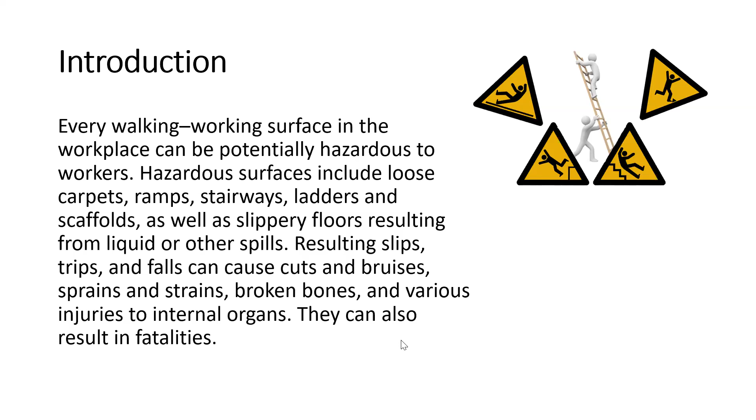Now we can see 29 CFR 1910. This 29 CFR is the code for general industry, and 22 is the section of this code. 1910 is the general industry code, and section 22 defines housekeeping.

As required by OSHA, we need to maintain the highest level of housekeeping within our companies. When we say housekeeping, it doesn't mean cleaning only. Housekeeping is a very broad term.

Have you ever heard the word 5S? Any of you? The word 5S, this terminology. I didn't understand what is 5S. 5, thumbs up. 5S? Yes. So this 5S - now write your assignment for tomorrow, you need to find out about 5S on Google.

This is basically a Japanese tool which focuses on housekeeping requirements. When we say housekeeping, it means that we need to sustain. It means that we need to standardize. We need to shine. So there are in total 5 S's.

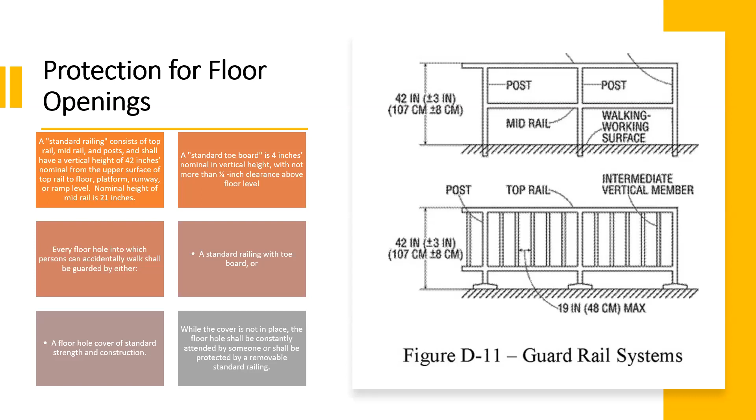Mr. Anas, you can use picture number 1 or picture number 2. Any question? Mr. Anas, I'm not able to hear you. I don't know why. Hello?

Stairways are required to have handrails under different conditions. Guys, I will mute you again, you're disturbing me.

If stairways are less than 44 inches in width, then we need to have at least one handrail. For example, if it is not a very wide stairway and not too many people are using it, then in this case we need at least one handrail, preferably on the right side, because in case of emergency people coming down need something to hold, otherwise they can collide with each other and falls become possible.

If we have stairways that are less than 44 inches, covered on one side and open on the other, we need to have a handrail on the open side. Similarly, if the stairways are open from both sides and are less than 44 inches, we need to cover both sides of the stairways.

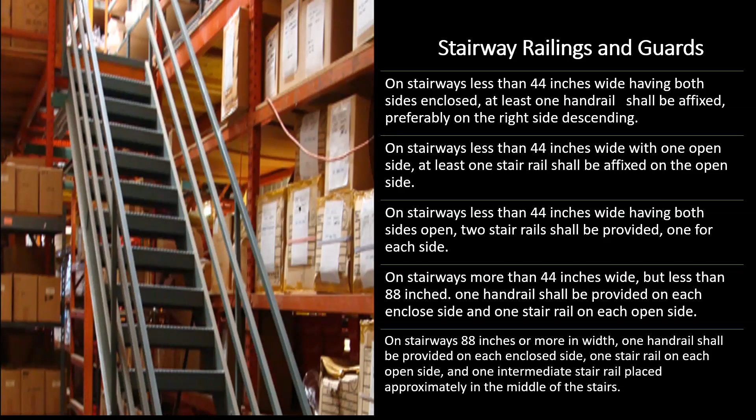Then we have fixed industrial stairs. Fixed industrial stairs are very common in the industries, right?

Sometimes you will find them fixed for some limited platform, or to gain access to some tanks, so the operator can go up whenever they want to make maintenance activities, cleaning activities, or check the temperature, pressure, or the amount of substance available in the tank. Sometimes in our stores too, we see these kinds of fixed industrial stairs available, for example when we make a platform on the same floor so material can be placed on it. So in this case, we are going to install fixed industrial stairs.

Fixed industrial stairs are discussed in 1910 section 24. It says that normally the fixed industrial stair shall carry 5 times the total weight that is going to be on it live. For example, if 2 or 3 people are using this fixed industrial stairs, or normally if there is only one person using it, they shall bear at least 5 times its load.

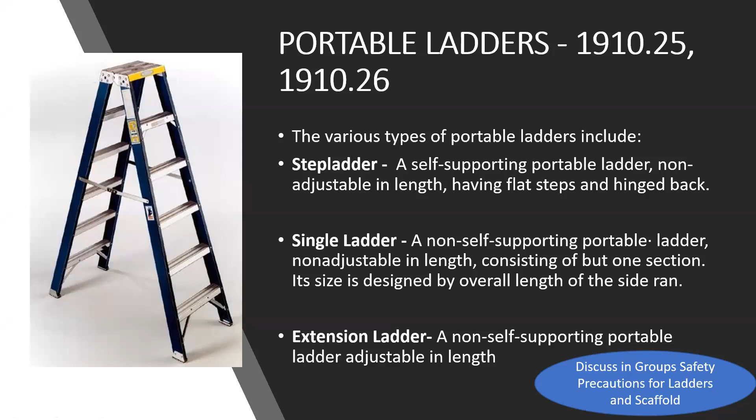So we need to know about the safety precautions regarding portable ladders, and we need to know about the safety precautions with regard to scaffolding. So what I will do now is divide you guys into two groups, so you can discuss and take out a minimum of 5 important points, and discuss in your own words the precautions with regards to portable ladders and scaffolding.

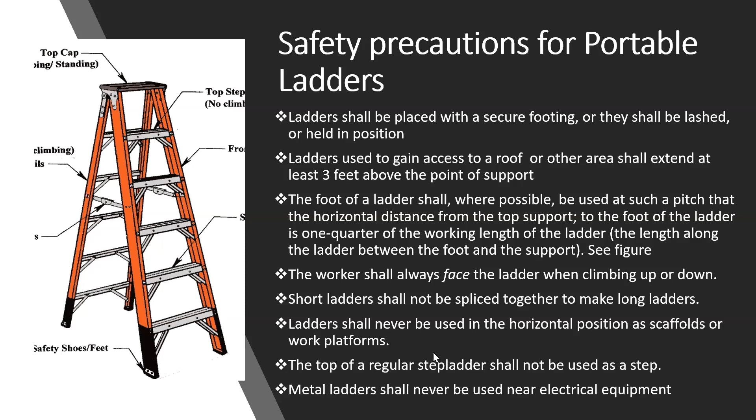Hello, yes, hi guys. You share the slide, yeah I will open the book, then someone will write it in Word. You have Adnan with you? Yes sir. Adnan is the expert for scaffolding, so your topic is scaffolding, okay? So Adnan can help all of you with this. Adnan, it is not necessary that we get all requirements from the book, but I would appreciate if you can share some practical requirements.

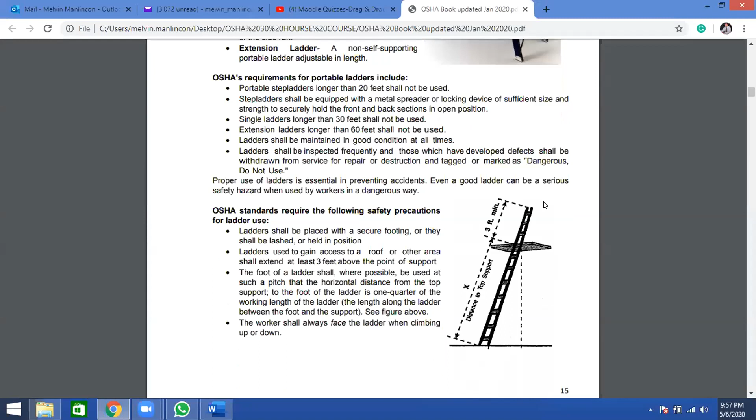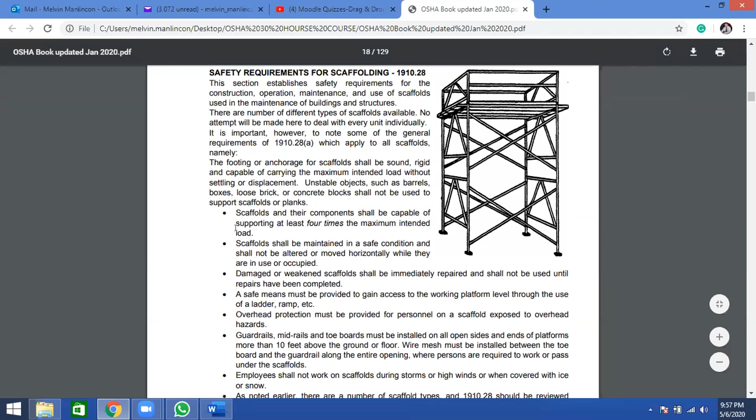Then who will do the writing? Because I'm sharing my screen, so I cannot use a Word file or Excel file right now. Hello, yes Melvin, so we are on scaffolding. Okay, so here's the scaffolding, we'll just select from this, safety requirements, then maybe Mr. Adnan could just discuss it. So which one will be our focus here? Okay, so I'll just open a Word file in this case.

Okay, so what should be our number one? Could you see my screen? Yes, I see. Please, what should be our topic number one here? Topic number 1 is scaffolding. So what do you want to read here? It's about the safety requirements.

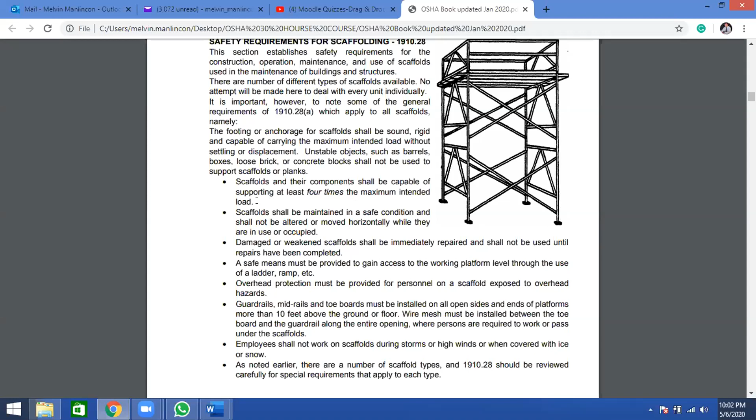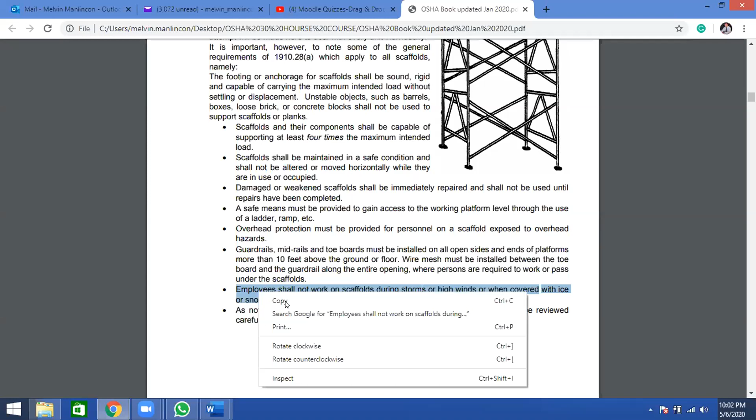Guardrails, yeah, this one above 10 feet shall not work. So of course, maybe you could just discuss this during sandstorms or high winds, right? Yes, you cannot work in that, so we'll just add this one.

The employee shall not work on scaffolding during a storm. So here in Saudi Arabia, sandstorm, right? Yes, so we have sandstorms and high winds. When covered with ice, okay, yes, so we'll just remove this one, since anyway we have no snow in Saudi Arabia, so let's just remove this one.

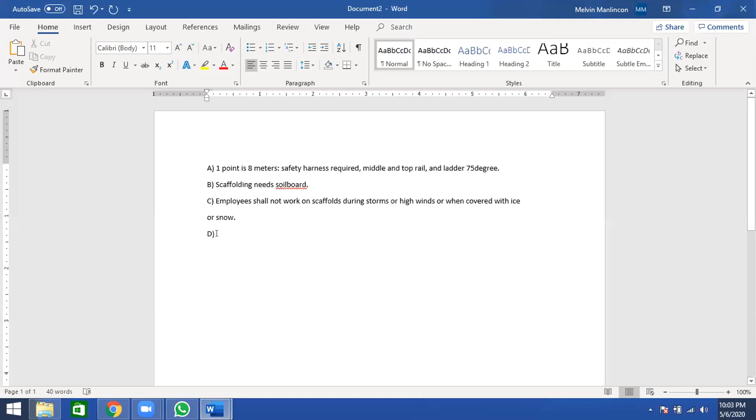Yes, okay, what else? I think we need at least 5 for scaffolding with sole board. So what else? Guardrails already mentioned, overhead protection, right? Yes, okay, yes, so then last one.

The last one mentions this hole, floor hole, or the platform hole. Hole, less than 12 inch. Floor hole, a platform hole. What's the spelling? Platform.

F-A-L, F, P-L-A-T, F-O-R-M. Pardon? F. P-L-A-T, platform, P-L-A-T, F-A-L. Could you... where's the chat? Could you just send me a message, guys? No, P-A, okay, P, so P-A, P-L, L, P-L, P-L-A-T, F-O-R-M. Slowly, is it correct? P-A-L-A? No, P-L, P-L, L-A, A-T. Yes, platform, not platform, platform. Platform, sorry, okay.

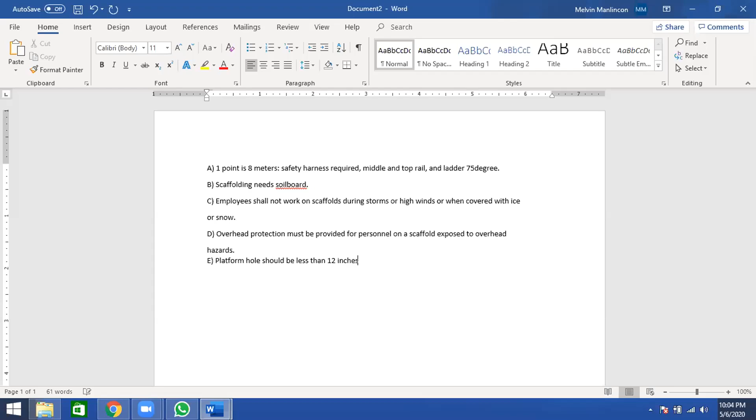The platform hole should be less than 12 inch, should be less than, fast, I'm going to finish in 1 minute, less than, should be less than 12 inches. Yes, 12 inch. So yes, guys, done.

3 foot minimum, yeah, 3 feet of ladder extending above the wall, the ceiling or the edge. Yeah, 3 foot minimum. Yes, guys, done, or still working? Yes.

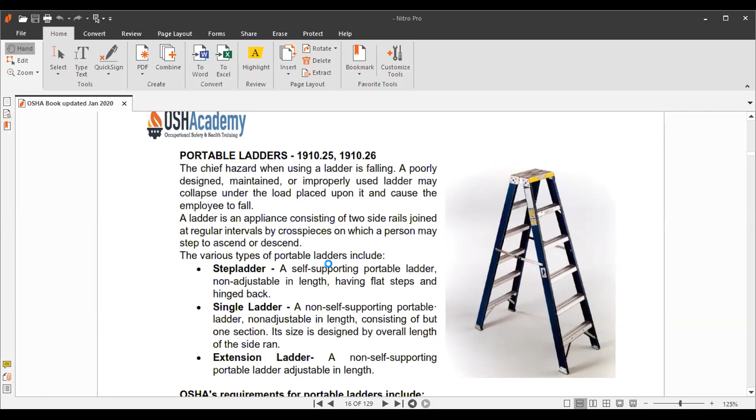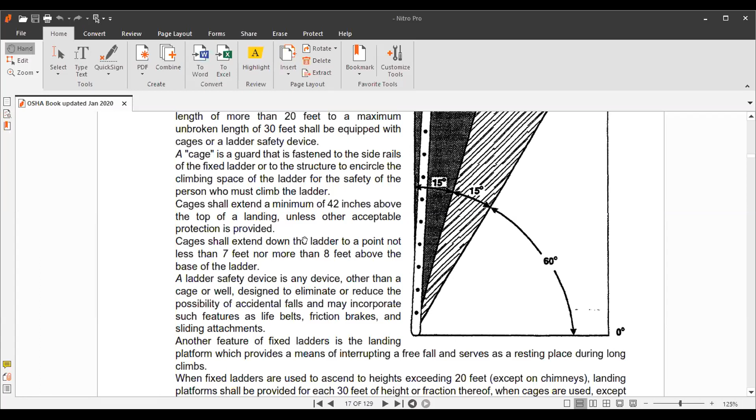We have covered some points here. Okay, last 2 minutes, fast. Steps, the distance, you see this angle, this angle 60, plus there is 15, 75, and 75.

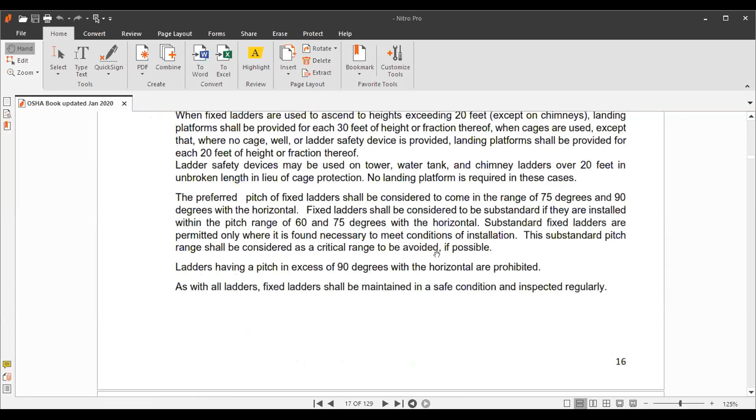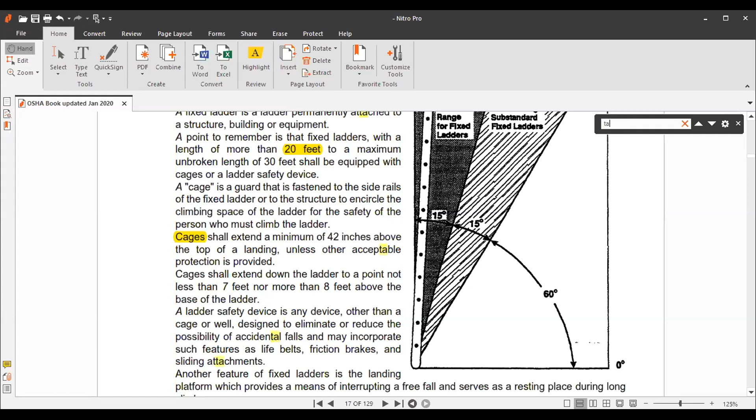Ladder shall be placed with secure footing all the time while we are going to use the ladders. Ideally, ladders should be inspected on a monthly basis if they are not frequently used, and not only monthly, but whenever you are going to use it, you need to carry out a pre-use inspection. During the monthly inspection of the ladder, if we found there is no damage and the ladder is in good condition, we can put a green tag on it, fit for use. Or if we point out that this ladder is not good for use, we can make it hold, and if maintenance is required we can make it hold, otherwise we can red tag it to not use this ladder. So that's why ladders are very critical operations, and there are always too many chances of accidents. Very good.

So about scaffolding, second group.

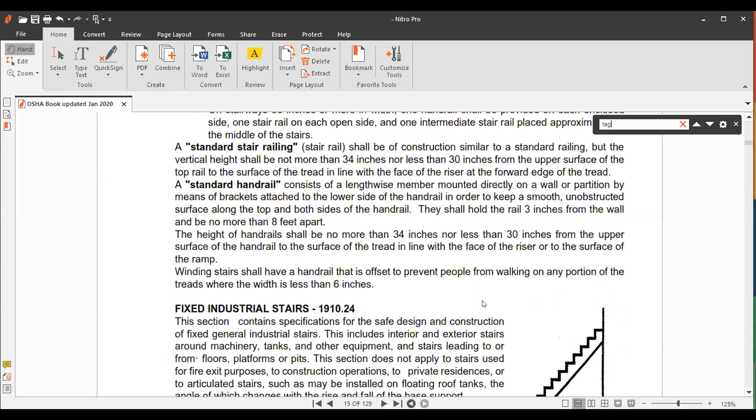Scaffolding. For the safety requirements for the scaffolding, Mr. Adnan Khan will discuss our points. I think Melvin, it's better that you share your screen and you can read whenever needed. Adnan can participate with you.

Yeah, okay, so once again, good evening to everyone. So for scaffolding safety requirements, at this session or workshop, Mr. Adnan was our advisor since he is working in scaffolding. So one point is the 8 meters, you write here 8 meter, 1.8 meter.

So he has written 1.8. Mr. Adnan will help me discuss it with you.

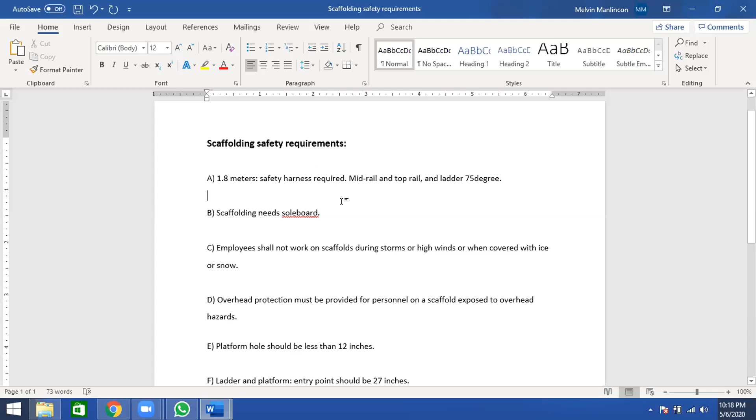In working with scaffolding, safety harness is required, as well as mid rail and top rail, and the ladder should be at 75 degrees. Whenever Adnan needs to add something, he will speak. Only 1.8, it should be decimal, 1.8 meters. So safety harness is required with mid rail and top rail, and the ladder should be at 75 degrees.

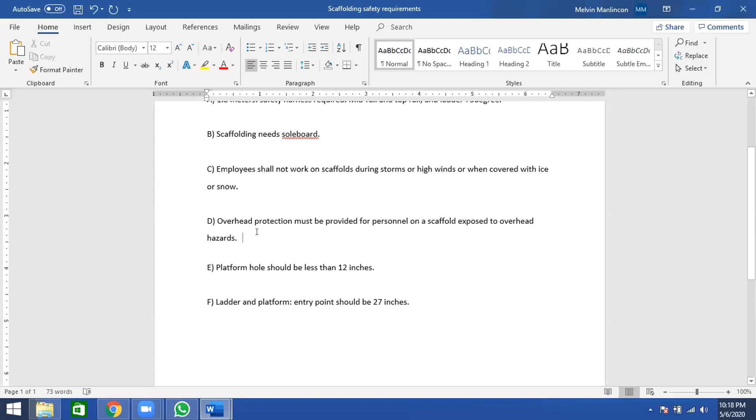Second point, scaffolding needs a sole board to stand firm. Scaffolding work is considered working at height, so employees should not work on scaffolding during storms or strong winds. We should also use overhead protection. Another point: platform holes should be less than 12 inches, and ladder and platform entry points should be 27 inches.

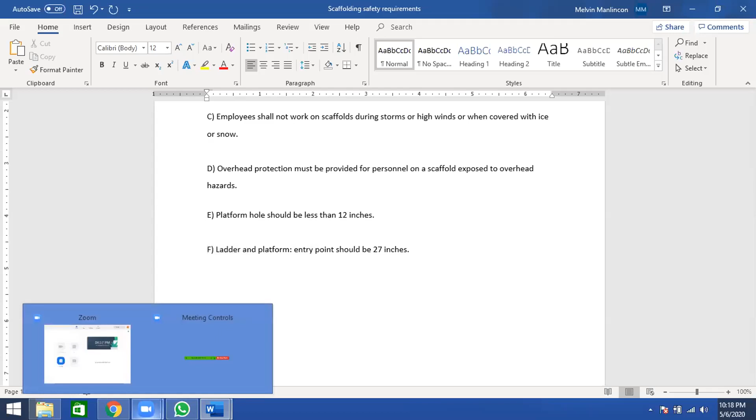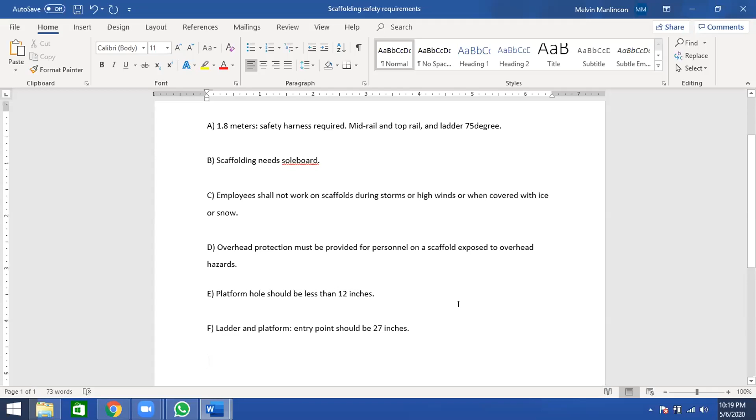Very good. Anything else, Adnan, or anyone else? I'll add one more topic: the ladder fixed to the platform should be almost 1 meter above it, 1 meter needed. Is it okay to use a ladder on the scaffolding?

Can we use a ladder on a scaffolding? OSHA does not prohibit it outright, but OSHA says it is a violation to use a ladder on a scaffolding, because if you are already using the scaffold, better to use the scaffold itself rather than a ladder. But scaffolding is needed sometimes, and this is a standard aluminum ladder that is used.

The platform is fixed with a clamp, either single clamp or double clamp fixed, after you use the ladder.

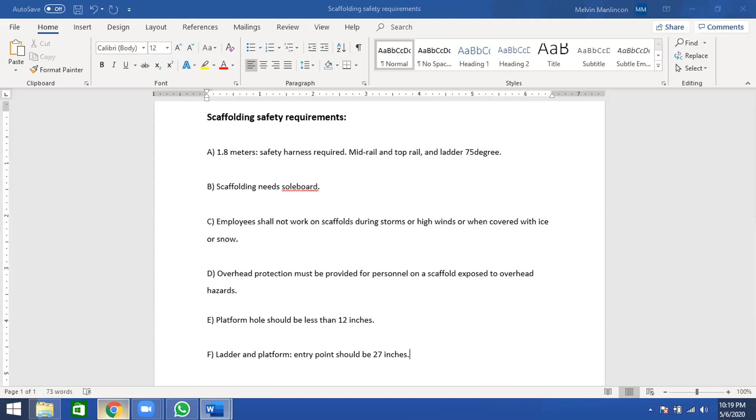One more thing, guys, about the scaffold: what is a sole board, and what is the entry point? The sole board is so that the pipe does not sit directly on earth, for stability. It's the same as the sole of your ladder, like a foundation, like the feet. Yes, this is the sole board, small support.

Another thing is when the scaffold can carry up to a certain load. Guys, you can stop sharing the slide, I will share mine. When we have the scaffold, it is necessary that the scaffold is designed to bear 25 pounds per square foot.

We call it a light duty scaffold when it can bear 25 pounds per square foot. Pound is a unit of force, and if 25 pounds can be borne by 1 square foot, we call this scaffold a light duty scaffold. Similarly, if 50 pounds per square foot can be borne, we call it a medium duty scaffold. And if it is 75 or above pounds per square foot, we call it a heavy duty scaffold. This is a general classification, and whether it's heavy, light, or medium duty depends on the design of the scaffold.

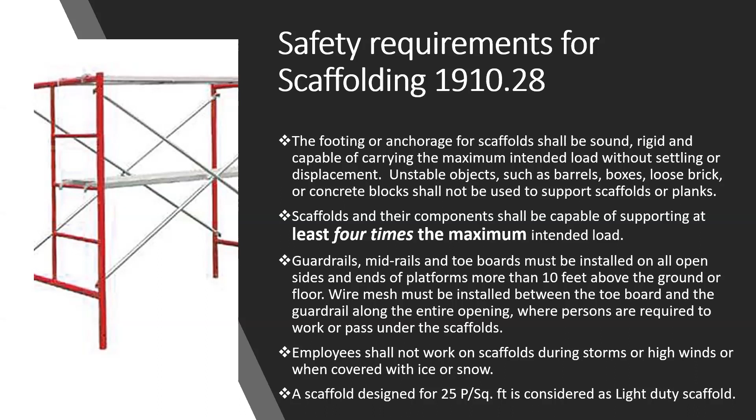In the OSHA 30 hour construction course, there is a full chapter on scaffold, and we are going to discuss it in detail.

Let's have a revision. Select the priority: what is the priority order for risk hazard abatement methods? Option A: administrative control, PPE, engineering control. Option B: engineering control, PPE, administrative control. Option C: PPE, engineering control, administrative control. Option D: none of the above. Which one is correct?

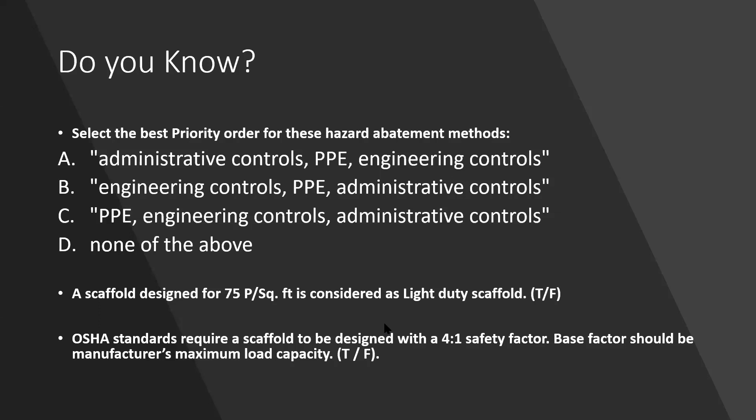Yes guys, it's none of the above, because PPE is never last. So it's none of the above. The right order is PPE last, engineering control first.

Okay good. Our next topic covers basically three topics in one module: exit routes, fire, and FPP. FPP stands for Fire Prevention Plan. This is one of the lengthiest modules; after this, all the modules are very short and we can speed up our learning process. So we will start with exit routes, then move to fire, then FPP.

What is exit route? Exit route is a continuous unobstructed path of exit travel from any point within a workplace to a place of safety. In simple words, this is the route which is leading to our emergency exit.

This route, or what we normally call emergency exit in our discussions, OSHA does not use the word emergency exit. OSHA uses the word exit. So whenever you find the word exit in this module, it means we are talking about emergency exit. If you have more than 2 exits in one room, you can declare one of them as an emergency exit, no problem. So an exit route is a continuous path which is unobstructed.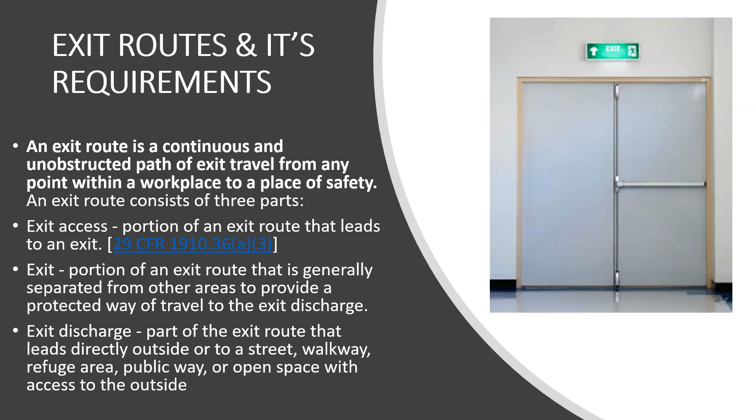Exit discharge is the area outside which is safe.

Now the requirements for exit route: there must be at least 2 exit routes available to permit prompt evacuation during an emergency. When we say exit route, it doesn't mean 2 emergency exits, it means 2 exits total. One of them we can declare as emergency exit, and one as normal exit. So if fire or emergency is on one side, we can go from the other side. Or if the fire is not in our area, it is in another area, so we can use any of the exit routes to get out of the emergency.

So the emergency exit should be located far away. It might be possible that to meet a standard's requirement, you end up having 2 doors at one place on the same side of the wall, adjacent to each other, while the opposite wall and other walls have no exit. This is not acceptable practice. Exits must be far away from each other, because if there is a fire or emergency on one side of the door, people can use the other door to evacuate the building.

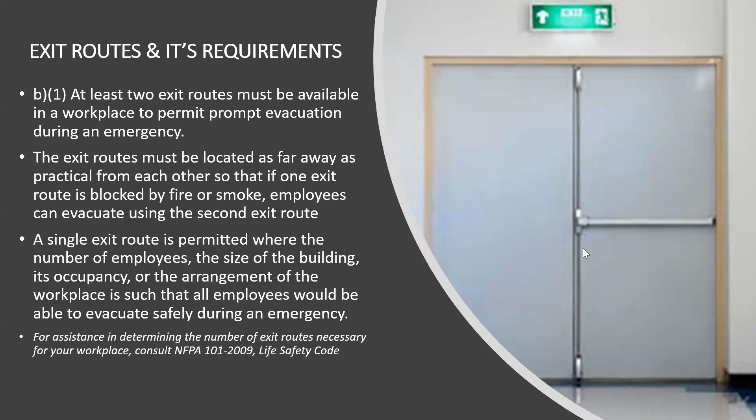And this more than one exit could be, one of them could be the emergency exit. Any question? Clear? Clear, sir, clear. Okay, good.

So the requirement for exit access is that buildings must be maintained to provide free and unobstructed egress from all parts of the building at all times when it is occupied. These emergency exits, emergency access, or emergency discharge always have almost the same requirements. One major requirement for all three is that these should not be blocked, should not be locked, and should not be obstructed by any means.

We have seen many times in our stores and production areas that forklift drivers and our people love to put pallets in front of the emergency exit, because they think this emergency exit is not going to be used. So they put old garbage, stock not in use, or stock that just arrived. Sometimes during audits we notice pallets or boxes blocking the emergency exit or exit door. When we ask why these boxes or pallets are there, they come up with the lame argument that the material just arrived and they will inspect it and place it properly later. This reason is unacceptable.

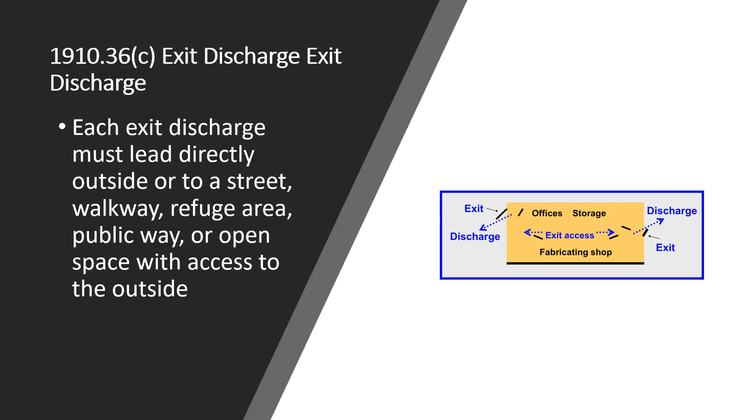We have the same regulation for exit access, exit door, and exit discharge. So as safety professionals, we should not be satisfied just seeing the exit access and exit door are clear. We need to check the door by opening it to see if the requirements are fulfilled or not. Every required exit, the way to approach it, and the way to travel from the exit into a street or open space, shall be continuously maintained.

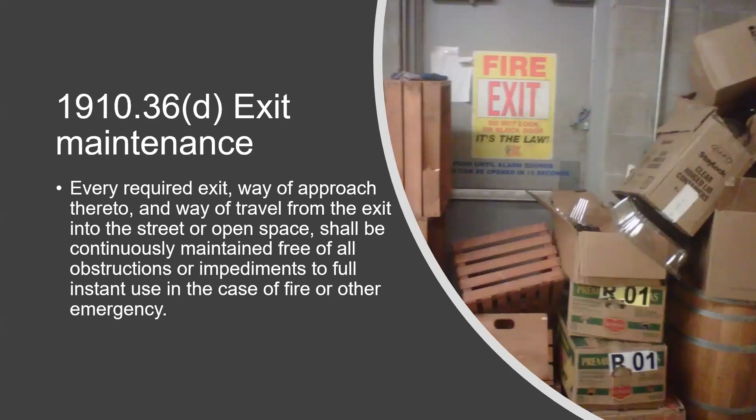Again, you will see the same requirement for the maintenance of the exit door, that it should be continuously unobstructed. And if there is a need to go to the open area, the exit access should be clear and free from any obstruction.

Another requirement is that a side hinge door must be used to connect any room to an exit route. For example, if the exit is far away and there are multiple rooms or halls you have to cross to reach the final exit, these doors, if closed, shall not be locked and can open anytime. They should not be sliding doors; they should open in the direction of going out.

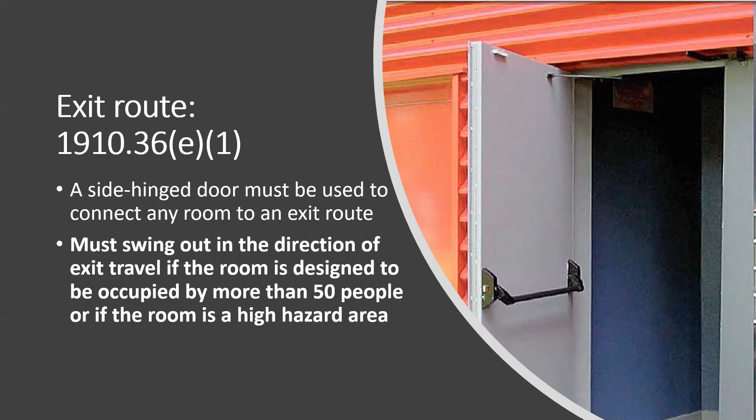Whenever we have more than 50 people available in an area, the emergency exit should always open outside. It is also a requirement of our civil defense and Civil Defense that we need to install push bar doors. These push bar doors, which you will find everywhere in companies now, can be opened from inside but cannot be opened from outside. So push bar doors are a requirement nowadays.

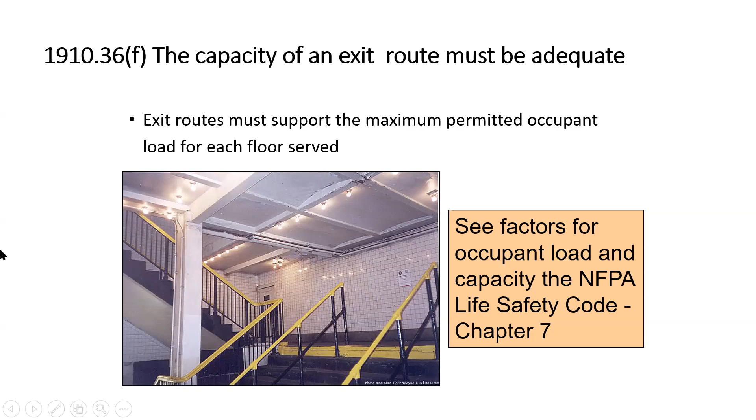Exit routes must support the maximum permitted occupant load. You can see in hotels especially, a lot of occupants stay on the above floors. If they are all coming together, our exit stairs and exit route shall bear their weight. It should be strong enough and spacious enough to bear the weight of occupants coming from above floors or other areas to go out. So the capacity of the exit route may not be decreased in the direction of exit.

Sometimes your stairs are very wide, but the emergency exit at the end doesn't meet the required standard size. It becomes a bottleneck, people come from the top and gather too much, wanting to go out, but the door is too small compared to the stairs. In this case, people get stuck and there is a chance of collision and injuries.

The ceiling should be at least 7 feet 6 inches high. For example, when coming from the first or second floor to reach the emergency exit, that area should always be 7.5 feet open, so a person can go easily and reach the emergency exit. The emergency exit itself should have a minimum height of 6 feet 8 inches, around 7 feet, so a person can go easily.

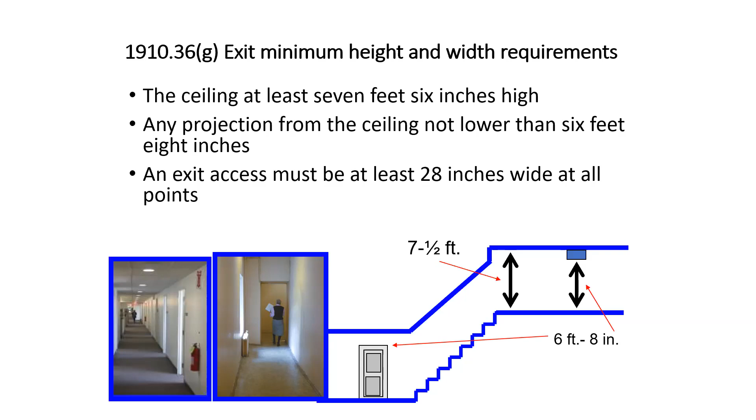There was also an emergency problem with HVAC systems that are interconnected between rooms. This is a common accident in hotels: people are sleeping, there is a fire in one room, and due to the HVAC system the smoke goes into other rooms, affecting other sleeping people. This is the same concept of compartmentalization.

Nowadays, even in HVAC systems, we don't connect all rooms with one pipe. We need to make compartments and partitions, so if one room is affected, all the other rooms shall not be affected—only a limited number of rooms can be affected.

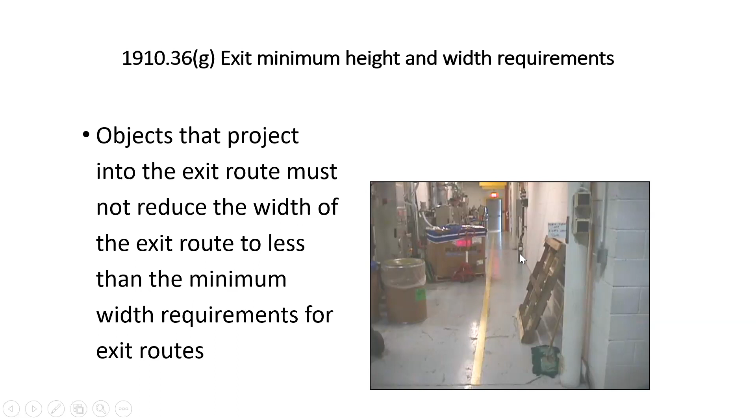Another common example is pallets placed in the walkway or exit access. Sometimes even fire extinguishers, mops, or boxes are placed there. These kinds of practices are common.

Another precaution regarding emergency exits is that we should not keep any flammable material near the emergency exit itself, because in case of fire, if that material catches flame, it will also involve the emergency exit area. Then the fire will be near the emergency exit, and how will people go out in this situation?

Lighting and marking must be adequate. Sometimes during occasions like National Day, Eid, or Christmas, when we decorate our offices and buildings, we don't focus and end up hiding signages, smoke detectors, or emergency break glass call points. These kinds of activities should not be performed.

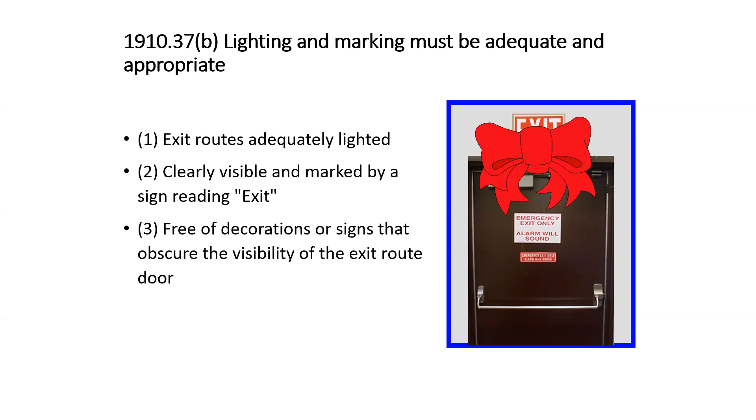Whenever we have the emergency exit, the exit sign shall be clearly visible and free of any decoration pieces, so that in case of emergency, people can see it easily.

Whenever we are working in an operation or production area, it might be possible that due to the size of machines and equipment installed, we will not be able to see the emergency exit directly. In this case, we need to provide clear signage so that people at any location can clearly see where the signs are and which path they need to take to go out of the area safely.

Sometimes you can achieve this by means of a walkway or signage marked directly on the floor. Nowadays there are very good quality paints available for marking purposes, or self-illuminating lights that you should install to show the direction of the exit route.

Always remember, when we talk about emergency exits or emergency access, there is no concept of relying on electricity as the first source. In case of emergency, the first thing maintenance people do is turn off the power of the company or area, because if the power stays energized, there are more chances of disaster. So all our emergency signs and exit identifications shall be self-illuminated.

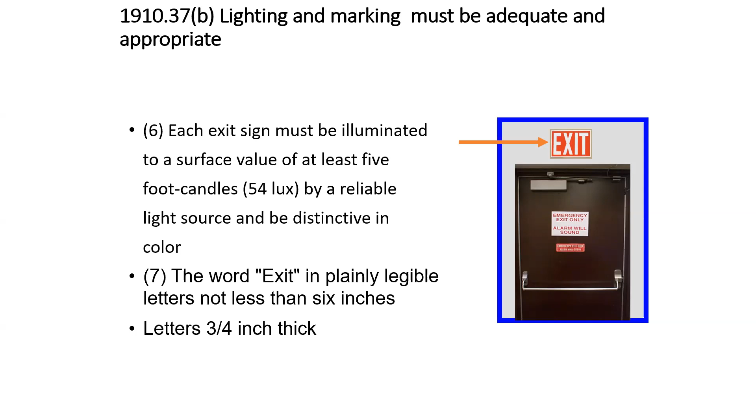The wording should be very plain, with a letter height of 3/4 inch thickness. So it should be quite clear—no fancy designing or calligraphy just because we consider ourselves artistic people. Signs should not be made that way.

Whenever there is a need for maintenance activities, ideally we are not required to block the emergency exit. But if it becomes very necessary to block the emergency exit due to maintenance activities, it is the responsibility of the people, the contractor, or the maintenance department to inform the people in this area that the emergency exit is blocked for some time—for example, 4 hours, 2 hours, or 2 days.

Because when we are sitting in our offices or working in our companies, at the back of our minds we are confident that our smoke detectors, fire alarms, and emergency exits are working fine. So if any emergency equipment or gadget becomes out of order and we have no idea about it, and an emergency situation arises, it will be very difficult for us.

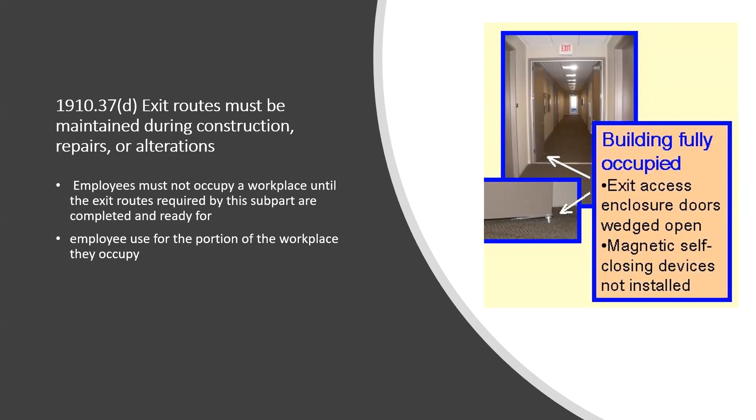That's why, whenever it is routine or non-routine maintenance where you are going to disconnect emergency equipment, or block the emergency exit or exit access, you need to inform the people who are working or occupying that area.

An exit must be separated by fire resistant material. Even here in the Kingdom, it is a requirement from the Civil Defense that whenever you are going to install the doors, they must be fire resistant. So when you are going to purchase the doors from any vendor who is providing fire resistant doors, he will ask you the question of how much time of fire resistance you need.

You need half an hour, 1 hour, 2 hour, 3 hour, 5 hour, or 10 hour resistance. Based on this, they are going to give you the quotation, because the more height or taller floors we are going to use, the more fire resistant capability the emergency exit should have.

For example, if our building is ground floor, first floor, second floor, up to 3 or fewer stories, then 1 hour fire resistant is enough. But if we have 4 or more floors in our building, our final exit must be minimum 2 hours of fire resistant, which means that even if it remains in fire for 2 hours, there should be no problem. This is one of the requirements.

Yes guys, any question from exit? Are you there or sleeping? No, sir. Clear? Everything's clear? Yes, it's quite clear.

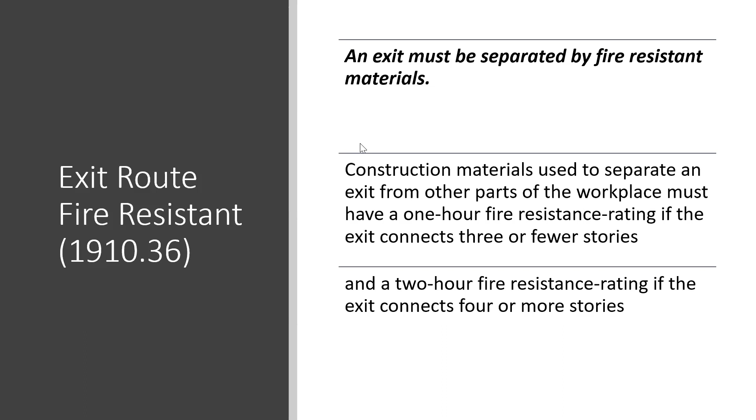Okay guys, what is emergency action plan? EAP, emergency action plan, is very necessary to develop in all organizations, right?

Whether you are following OSHA or not, nowadays COVID-19 is one of the emergency situations. We have fire in oil and gas, we have H2S emergency situations, gas leakage in some companies. For example, when I was working in the steel industry, we had ammonia gas where we crack ammonia into nitrogen and hydrogen.

For example, if you are working in a steel industry, you have emergency situations like falling of load, falling of coil, or falling of material from the crane. These are common emergencies in many industrial areas. It is not necessary that all companies will have the same emergency situation.

So the standard says we need to have the emergency plan according to our requirement. It is very necessary that if you are in oil and gas, you should not follow the requirements of general industry, the manufacturing company. Since we need to follow our own emergency requirements, we follow our general industry rule.

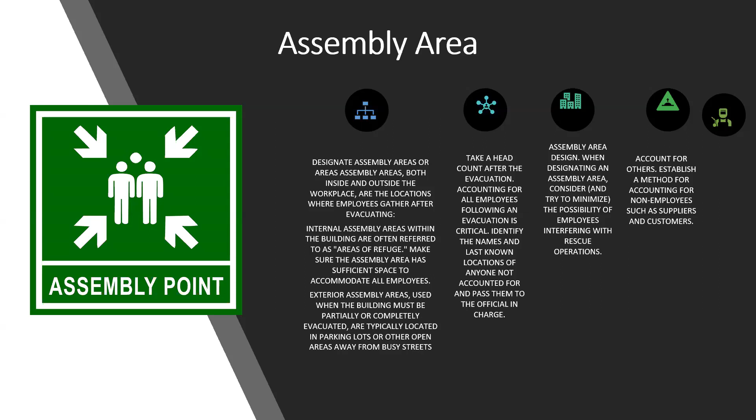That's why, as part of our emergency preparedness, we need a centralized announcement system - not just an alarm system, but an announcement system - to tell us where we need to go, where we need to evacuate, and which departments are required to evacuate. It might be possible that the emergency is only in one or two departments and not the whole company, so a centralized addressing system can be used to give directions and instructions on how we are going to react in this situation.

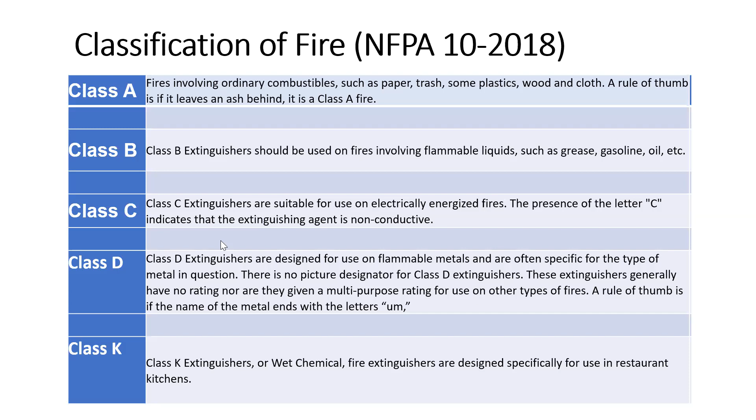Your assignment is types of fire extinguishers. Okay, types of fire extinguishers. Just focus on three types: powder, CO2, and water. Right? Quick.

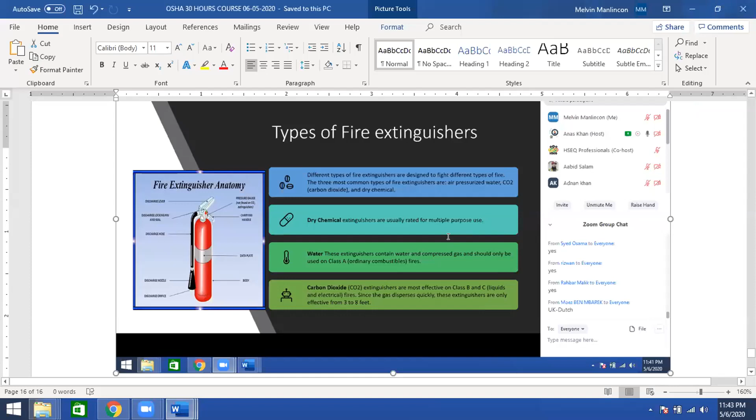So who else are there? There is Melvin, Rahbar, there... guys, you will be discussing the classification. Okay, classification, types, classification of fire extinguisher. Yes, this one. Not this one. Yes, this one. Classification.

Yeah, Melvin, you can start.

Yes, so class A fire extinguishers are for - the rule to remember is anything which becomes ash once you get rid of it, so it's what becomes ash after the fire is controlled. Examples like paper, trash, plastics - all these kinds of things become ash. Wood and cloth. So who is writing? Melvin, will you be the one to speak today?

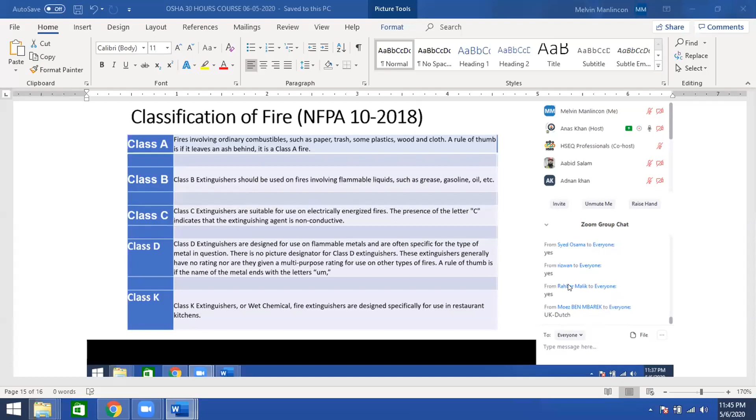Class B will be anything which involves flammable liquids and catches fire. It can be benzene, what we say in Saudi Arabia, any kind of gasoline. Anything which has a liquid form and can be flammable liquid uses class B.

So Rahbar and I will start. Yes, please. Rahbar, can you start with classification of fire? Hello. You can start, Rahbar.

So there are basically five major kinds of classification of fire extinguishers, according to safety. Class A is ordinary combustibles, the thumb rule being whatever transforms to ash after the fire is controlled. Example, if paper or plastic catches fire, it keeps a bad kind of ash, but still ash. Then you have garbage or trash, etc. Whatever forms this kind of object if they catch fire - it's class A, an ordinary fire extinguisher you can say.

Then class B is flammable liquids, any kind of liquid which can catch fire, like grease, benzene - we say in Saudi Arabia, petrol in India, Pakistan. So if that kind of liquid catches fire, to control it well we use class B fire extinguishers.

Class C is for electrical equipment, non-conductive. So some rule in that - any kind of electrical, to save it from further electrical hazard or electrical fire, to be precise, you use class C fire extinguisher.

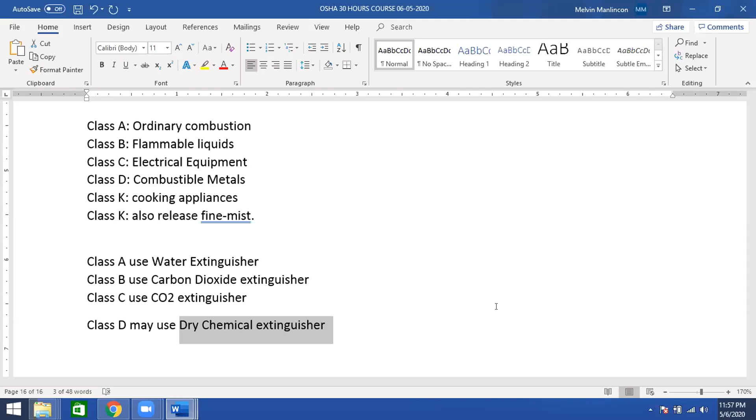Okay, thank you, very good, very good, very good. Yes, next group.

Hello. So now we're going to discuss about fire extinguishers. We're going to discuss about 3 fire extinguishers: dry chemical, and water.

Starting with water. These kind of extinguishers contain water and compressed gas and should only be used as class A. Class A is a very ordinary kind of combustibles, so when we talk about water, we're dealing with papers, trash, and all that stuff. It's not going to be a very severe fire, by putting water into it.

Now comes CO2. CO2 is most effective on class B and C. These classes are something which could turn into a catastrophic situation. Carbon dioxide extinguishers are most effective on class B and C, like liquids and electrical fires. Since the gas disperses quickly, we need to keep in mind that in order to be effective, it should maintain the distance between 3 to 8 feet.

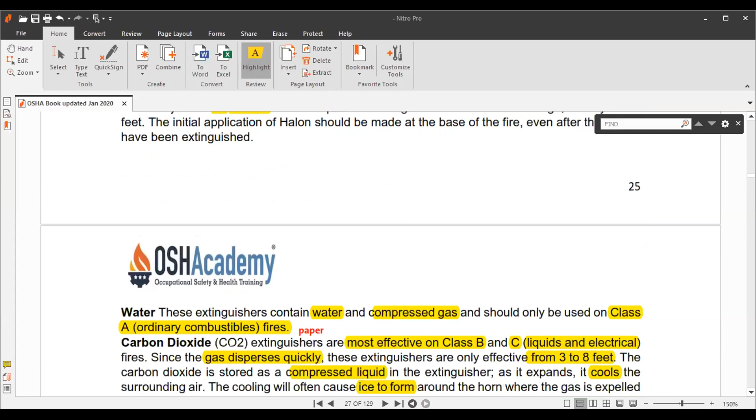Dry chemical, we can use it for multi-purpose. And just for CO2, we cannot use this in confined spaces because it can cause asphyxiation of the user. At confined spaces, we need more amount of oxygen.

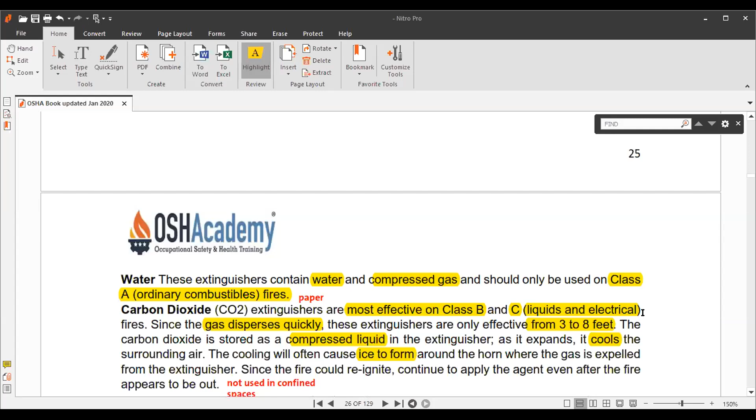Now my one question I have: if you guys have seen that most of the time we have a gauge available on fire extinguishers, but on CO2 we don't have the gauge available. Why?

Because the gas pressure release from the extinguisher could be done in one go. There is no quantity setup, or the flow setup is not required. Whenever we have the gas, the gas is occupying all the area, whatever is available. If you have a small area or a large area, the gas is going to occupy all the area. So even a small quantity of the gas in our fire extinguisher, still this gauge would be keeping it full, right? It will show that the gas is full.

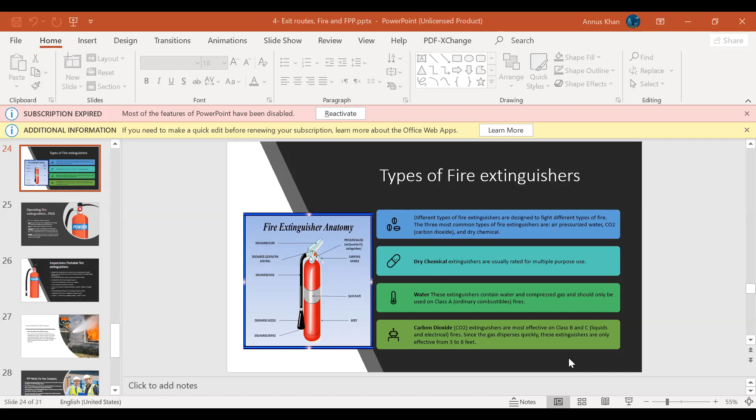If we have the gas full, it will still be showing full. So it will become useless. That's why for CO2 or gas related extinguishers, we are always checking by weight, right? The weight is mentioned on the cylinder itself, and we go by weight, not pressure. You need to check by weight, 5 pounds, 10 pounds, or 5 kilos.

In liters, kilos also we can measure, right? Yes, exactly, 50 liters, 100 liters, like this.

Also, one of the reasons we have the gauge on DCP or water but not CO2, is because in DCP or water, the gauge is with the medium itself. There are two mediums in the DCP: one is the pressurized nitrogen gas, and another is our powder. So with the passage of time, if we are not going to shake this fire extinguisher minimum on a monthly basis, the powder, which is heavy, will go down and settle, and all the gas, which is a lighter medium, will go up. That's why whenever we are going to use the fire extinguisher for DCP, it is highly recommended to shake it, especially to keep it ready all the time, we need to shake it when we perform the inspections, right?

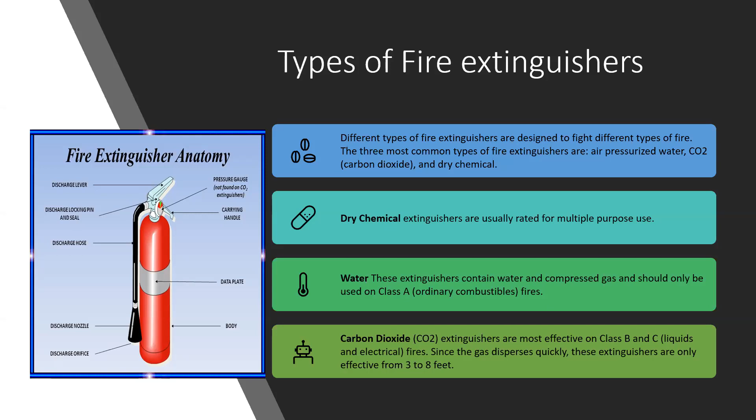Okay, now how to use a fire extinguisher. I hope everyone knows about this—we need to use the word PASS: pull, aim, squeeze, and sweep. Pull the pin out, then aim at the bottom of the fire, at the root of the fire from where it is igniting, and then squeeze. We need to squeeze the handle, so press the handle and the medium inside will come out, and the direction of the nozzle should be on the fire. And then we need to make a sweep.

Don't use all the fire extinguisher at one place, because fire is spreading. You should also use the fire extinguisher medium on the nearby area, so there is no chance of fire. It is recommended that whenever you use a fire extinguisher in any area, you should remain vigilant for a minimum of 15 to 20 minutes, because it might be possible that the fire inside or under the surfaces still has some source of energy remaining. When you leave the area, with the passage of time, it gets more oxygen, and heat is already there, and fuel is already there.

So there is a chance that it will reignite. In companies, whenever you are doing this activity, it is the responsibility of the fire watch. This person remains there even after you fight the fire, or whenever you use any ignition source, to make sure there is no such fire situation available that could reignite, right?

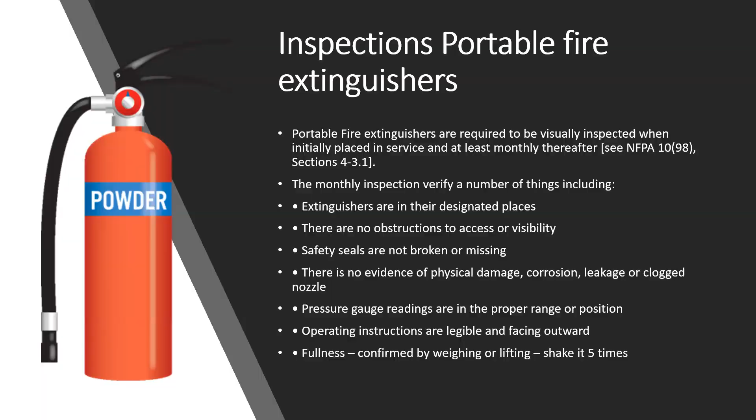So these are some of the requirements for the fire extinguisher. Then we have FPP, fire prevention plan. Remember, before we discuss the emergency action plan, the emergency will come later on. The first thing we need to cover is preventing the fire.

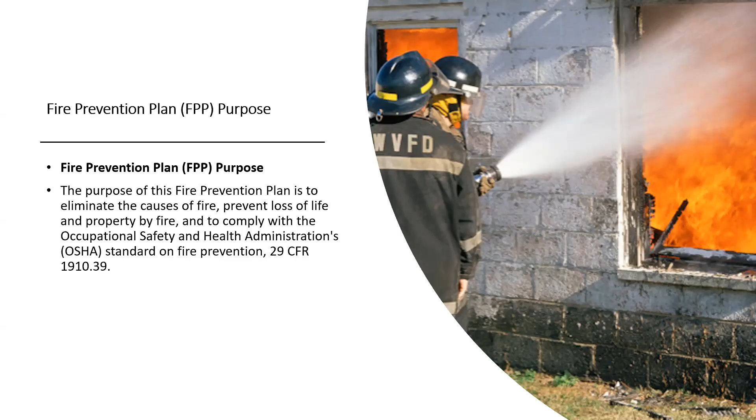It's very simple. The fire prevention plan says that we need to identify all possible areas where the chance of fire is available. For example, we need to identify the chemical area, the server area, the control panel area. In our workplace drawing, we need to identify these as our critical areas, and once identified, we need to take action on them.

For example, the segregation of material, flammable and non-flammable material, segregation of chemicals. Where possible, nowadays fire resistant paints are coming, fire resistant doors are coming. We need to have the firefighting system available.

For example, in server areas before we had CO2 systems, but as I told you, CO2 is not a human friendly gas. So now companies are using, instead of CO2, the FM200 system, which is more advanced and more human friendly compared to CO2.

So after identification, we need to segregate the area by means of compartmentalization, fire resistant paint, detectors which are going to be installed, and segregation of material itself. In this way we can prevent the fire, because once the fire is ignited, the emergency action plan will be started. But to avoid this emergency situation, especially for fire, we need to develop the fire prevention plan.

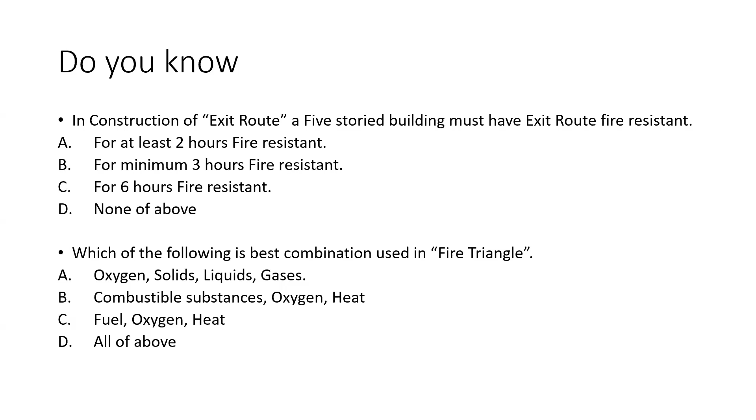Why? Because we can use DCP, no problem, but the issue with DCP is that its layer is very strong. When it sticks on material, it's very difficult to remove, so the powder might go inside equipment and damage ports or capacitors, critical things like that. That's why we avoid DCP. CO2 is a gas, it cools and then disappears, that's it. But if CO2 is not available and you have no other option, instead of water you should use DCP.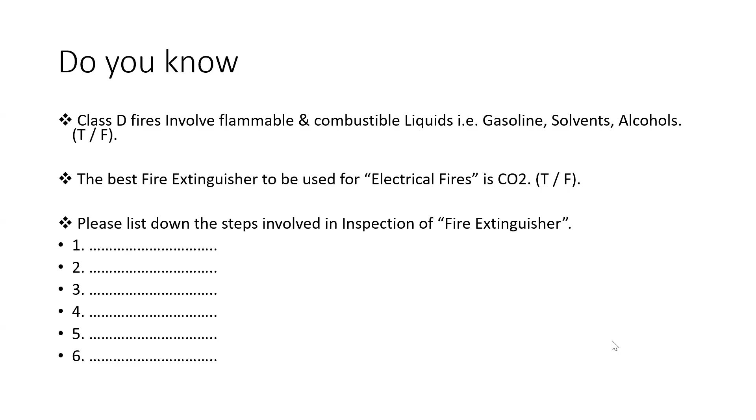Alhamdulillah, we finished this. Now our next topic, without wasting time, we have a small topic of PPE. Your favorite thing, PPE. I don't like PPE, but all of my participants always love PPE because this is the best thing for the safety department. We can start this so we can finish on time, inshallah.

Electrical safety is topic number 5, but I'm skipping this because it will need more than 15 minutes and we only have 15 minutes. So that's why we are starting with PPE at the moment, because it will not take much time. You are well aware of PPEs.

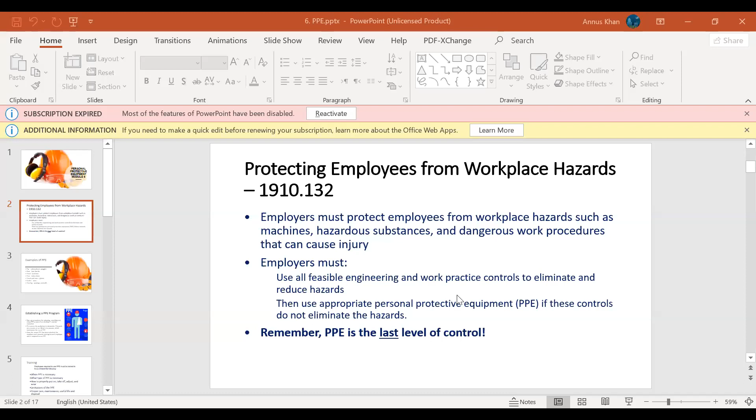Can you see the screen? Yes. Good. PPE stands for what? Personal protective equipment. Personal protective equipment, which means personal, which means for a single person, not for everyone.

And in our companies, we use helmets for each other, we use ear plugs for each other, sometimes we also use shoes for each other. So when we have PPE, it means it's for personal use. It is a very personal thing. You are not going to share it with anyone, especially in the days of Corona, when we are not sharing anything with each other. So this should become our practice even after Corona, that we are not going to share with each other, though not sharing your things is not always a good thing.

Section 132 discusses PPEs, but this section starts with clear instructions that before using PPE, you need to make sure you have applied all the possible controls, remember the hierarchy of controls: elimination, substitution, engineering control, administrative control, and then you go for PPE. PPE is the least effective, the last level of control. PPE is our last line of action. After PPE, there is no such control, and there is a possibility of accident.

So who is going to tell us when we are going to use PPE? Which study is going to tell us? From where does the requirement of PPE come? The hazard of the workplace. Very good, very good. It should be risk appropriate. The risk assessment is the guiding document.

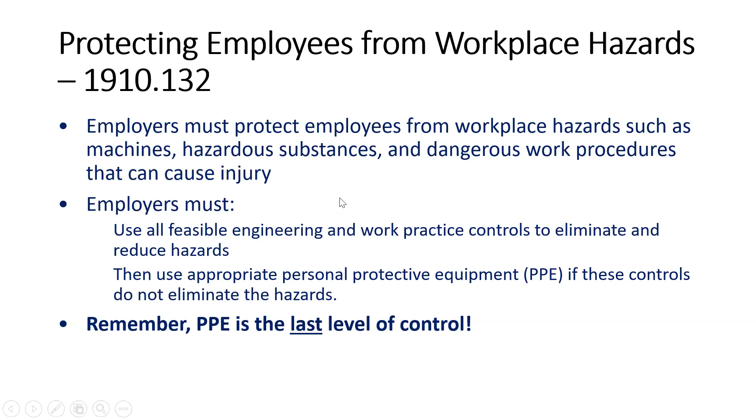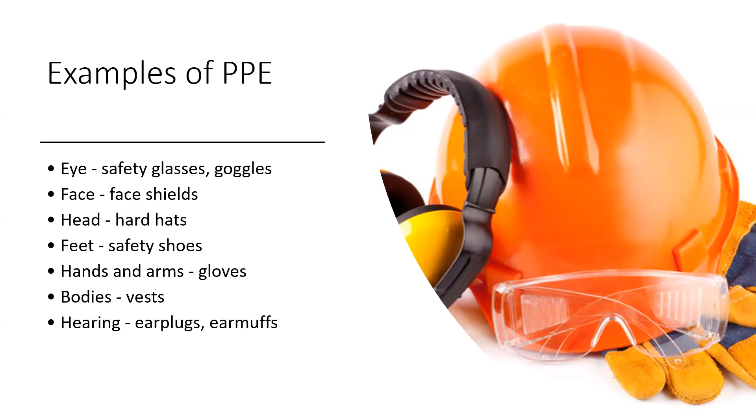You are very experienced, you have a very good idea about the workplace, but you have a limited mind. You can think only so much. When you have more than one person, you can identify many more hazards. That's why risk assessment is always recommended to be done in groups. Examples of PPE that we all know: for the face, for the eye, for the head, for the feet, for the hands and arms, for the body vest, and ear plugs.

Before using PPE, we need to establish the PPE program. This PPE program is required by OSHA. What are the requirements in this PPE program? It is not something like you just need to establish the emergency action plan.

This PPE program is a very simple program where you identify the area, then the relevant PPE, then how many people are working in this area who are using this PPE, and how much is the minimum quantity that should be available for this PPE. So it is a very simple thing.

Why do we need to have this PPE program available? To make sure that there should be no lack of PPE at any time. And for people, for example those who are new in the company, when they see what is the PPE program for my department, they will clearly know which PPE we are going to use while performing the task. The same thing can also be used by referring to the risk assessment.

But it might be possible that all of the people are not aware of the risk assessment. They don't know how to read it. That's why a simple PPE program should be mentioned on a chart, on a document, or on the notice board. You can mention which activities require PPE, what kind of PPE, how many persons are going to use it, and what is the minimum stock available for this PPE.

It is very necessary that when we are using PPE, we need to provide training to our staff on how to use it. We have seen many times that people use PPE but not in a correct manner, especially when it comes to full body harness or safety belt.

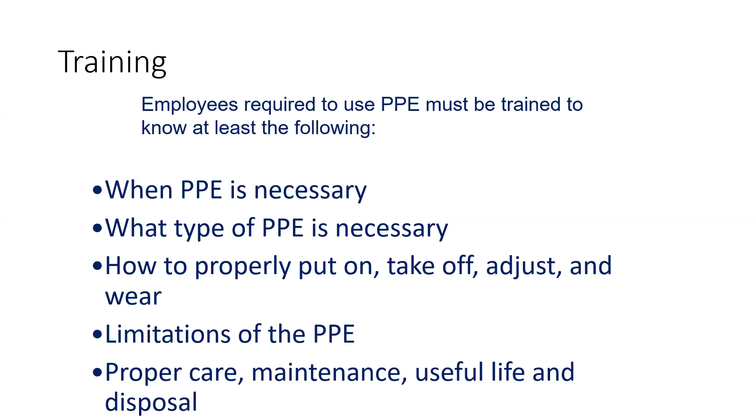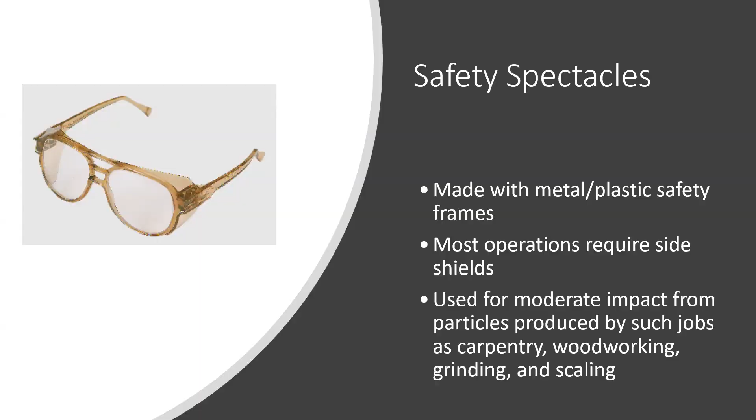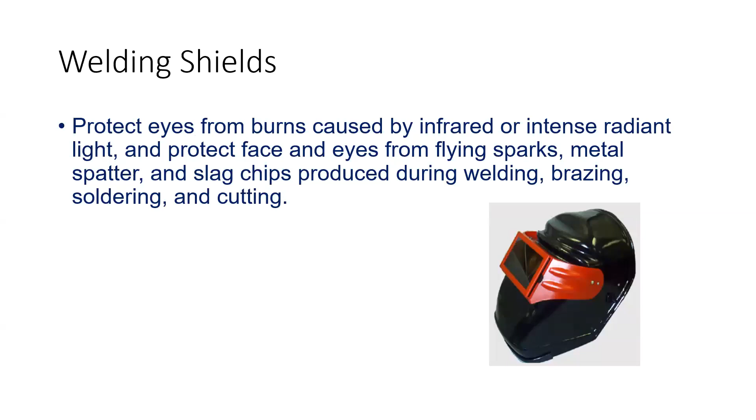Safety spectacles: whenever we have metal or plastic chips available, we need to use safety spectacles. But if we have fumes available, in this case we need to use goggles, which are also covered from the side to avoid any kind of splashes. If we are involved in welding, we need to use a welding shield, which can protect our whole face and eyes as well.

Head protection is very necessary. The head is one of the strongest parts of our body, but at the same time it is also a very critical part. Any injury that hits your head makes it very difficult for the survival of a human when the head is injured.

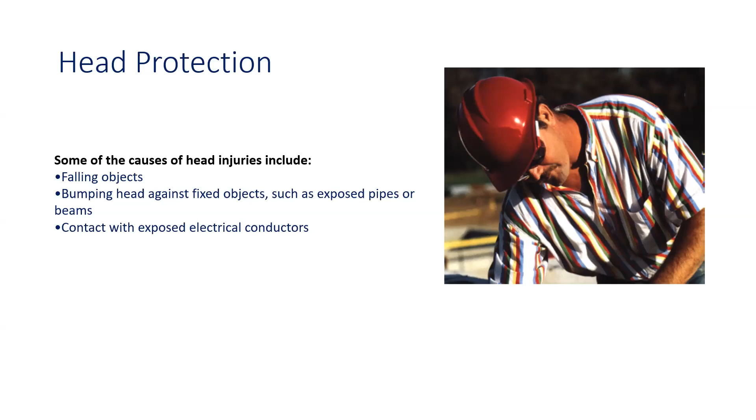For general purpose, if you are not involved in the above activities but you are maintenance staff or an operator who has to go inside machines, under tables or conveyors, where there's a chance your head can hit the roof or surface, or there are sharp edges from the side which can cause head injury, in this case we use a bump cap, or class C type of helmet.

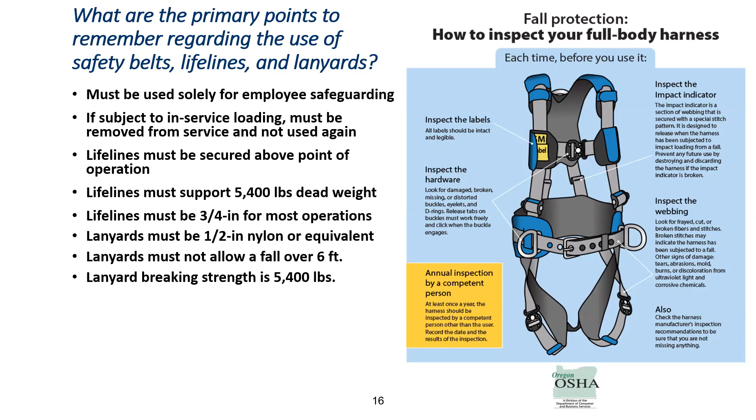Lanyard breaking strength is 5,400 pounds. You can see that even for a single person it is used, but the breaking strength is very high -- 5,400 -- because it might be possible that you fall from too much height where your weight is going to increase too much due to gravity.

Hardware must be drop-forged or pressed steel or cadmium plated. This hardware -- for example the belt and all the metallic parts -- should be made up of steel or cadmium plated to have the strongest strength.

As required by the Kingdom, all your lifting equipment shall be inspected on an annual basis by a third party. But for these kinds of PPE used for personal purposes, these are also required to be inspected, and as required by Aramco, it must be on a 6 monthly basis. So we need to consider these requirements. As required by OSHA, it is an annual requirement, but for Aramco it's a 6 monthly requirement, and whenever you are going to start a project, you must submit the certificate for all the body harnesses and other PPEs which are required to meet a standard.

Hardware must be smooth and free from sharp edges, and it must withstand tensile loading of 4,000 pounds without cracking, breaking, or deforming. So these are some of the requirements which we need to focus on while using the PPE.

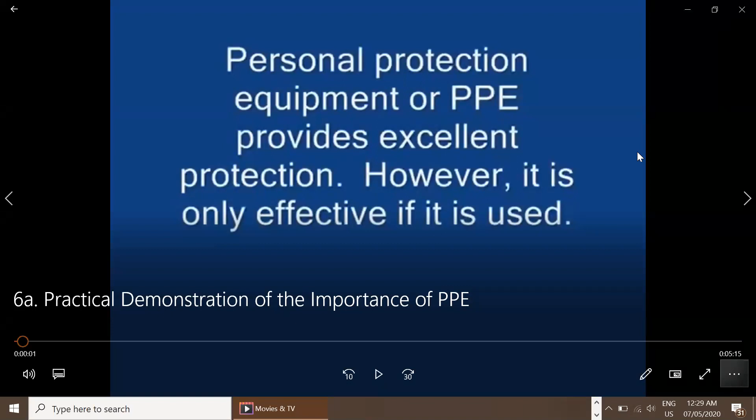Can you see the screen? Yes, sir. And sound? No sound. No problem, there is no such communication needed.